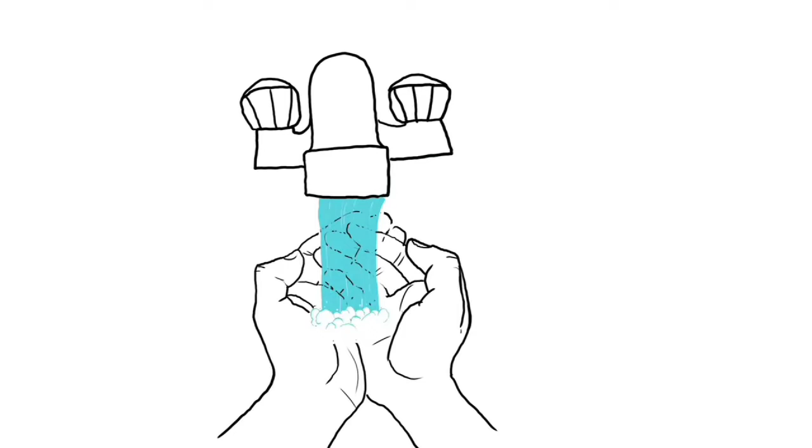You might have heard that we're running out of fresh water. This might sound strange to you because if you live in a place where water flows freely from the tap or shower at any time, it sure doesn't seem like a big deal. It's just there, right? Wrong. The only obvious thing about fresh water is how much we need it. Because it's essential to life, we need to think about it carefully.

Right now, at this very moment, some people, women and girls in particular, walk hours and miles per day to get fresh water. And even then, it may not be clean. Every 15 seconds, a child dies due to waterborne diseases. This is tragic. The most compelling reasons to think about fresh water therefore have to do with the global common good. This means recognizing how much fresh water matters for the flourishing of human and non-human life on Earth, now and in the future.

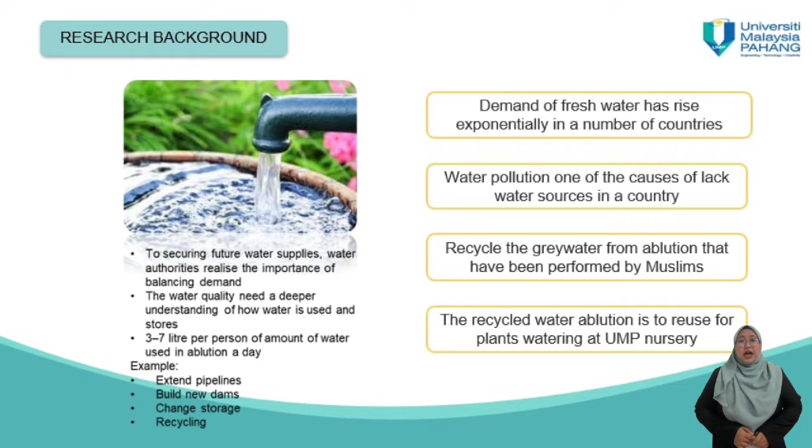Globally, demand of fresh water has risen exponentially in a number of countries. From the research, we know that water pollution is one of the causes of lack of water sources in a country. So another recycling method we can do is recycle the grey water from ablution performed by Muslims. After that, the recycled ablution water can be reused for watering plants at UMP nursery.

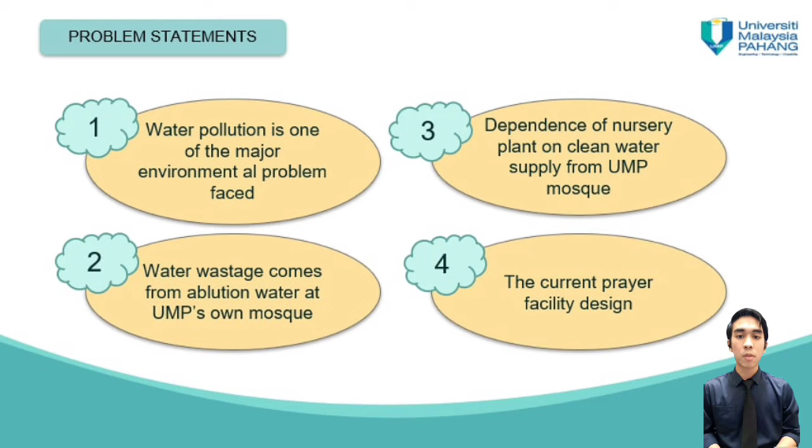For the research background, we have come out with a few problem statements that focus on our research study. First, we found that water pollution is one of the major environmental problems faced. Second, we found that water wastage comes from the ablution water at UMP mosque, and the nursery plants depend on the clean water supply from UMP. Then, the other problem is the current prayer facility design, where the pipeline from the ablution area was directly discharged to the drain without any treatment.

Therefore, based on the problems we found, we aim to study the characteristics of water in UMP Gambang Mosque. After studying the water characteristics, we design and fabricate a filtration system and an Eco-Wudhu system for irrigating plants. Then we evaluate the performance of the Eco-Wudhu system by determining the water characteristics.

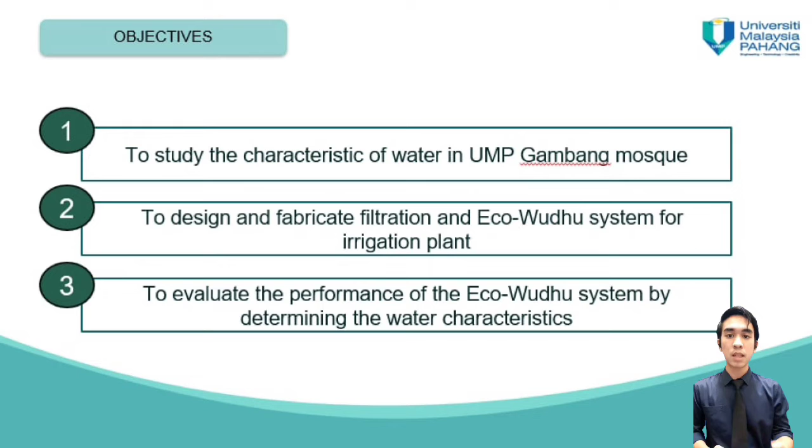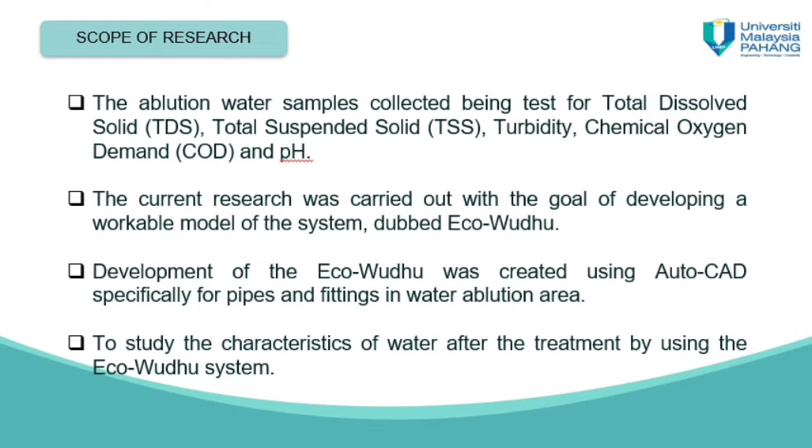Next, the scope of research for this project: the ablution water samples collected are treated and tested for total dissolved solids (TDS), total suspended solids (TSS), turbidity, chemical oxygen demand (COD), and pH. The current research was carried out with the goal of developing a workable model of the system, which is Eco-Wudhu. The development of Eco-Wudhu was created using AutoCAD, specifically for the pipes and fittings in the ablution area. In this study, we also examine the water characteristics after treatment using the Eco-Wudhu system.

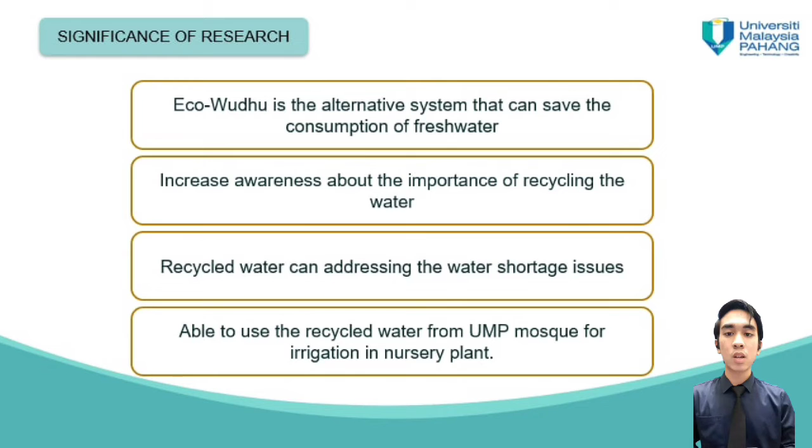The significance of the research is that Eco-Wudhu is an alternative system that can save the consumption of fresh water, and it can also increase awareness about the importance of recycling water. The recycled water can address the water shortage issue. Lastly, we are able to use the recycled water from the UMP mosque for irrigation in the nursery plant.

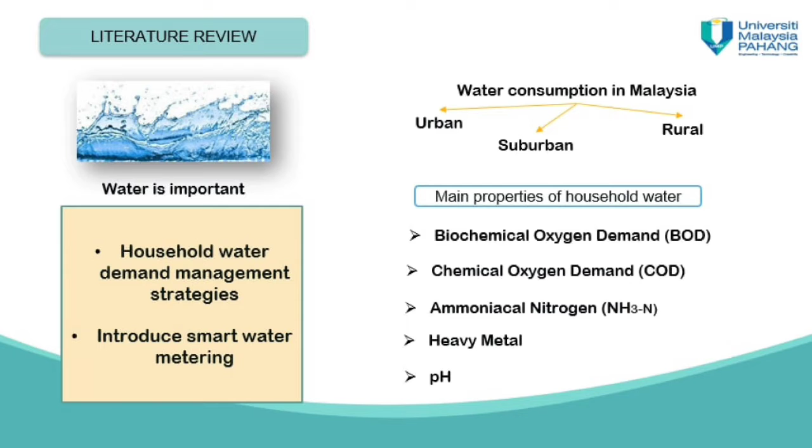Water is important. Therefore, we need management strategies for household water and to introduce smart water metering. Water consumption in Malaysia is needed for urban, suburban and rural areas. The main properties of household water include biochemical oxygen demand (BOD), chemical oxygen demand (COD), ammoniacal nitrogen (NH3-N), heavy metals, and pH.

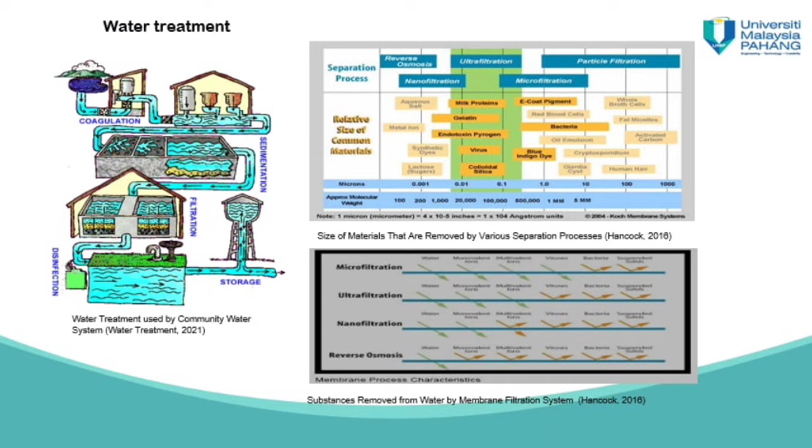Usually, for the current water treatment used by community water systems as per the picture, the system starts from coagulation, sedimentation, filtration, disinfection, and the last one is storage. This is the water conservation strategy. Rainwater harvesting is one of the strategies researched, which can help prevent wastage of water and also reduce irrigation losses. From this water reuse strategy, the water can be used for irrigation, residential uses, urban and recreational uses, and also for aquaculture.

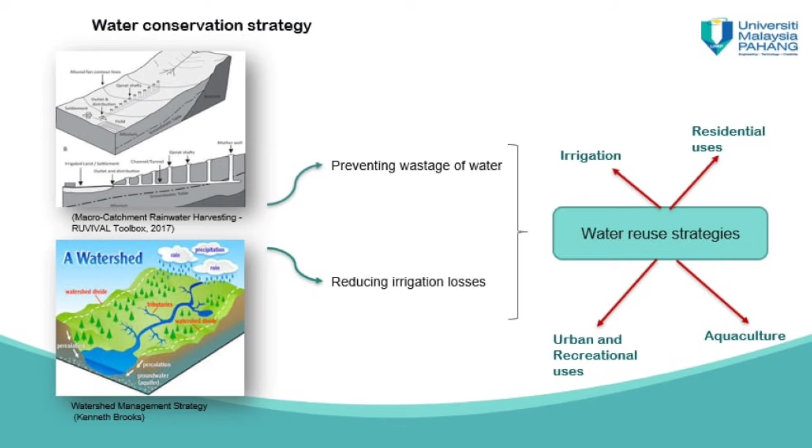Next is the research methodology. Firstly, I would like to explain the flowchart of this project, starting with carrying out the study at the location, which is at UMP Gambang Mosque, from inside view and outside view. Then, we study the sampling location where the greywater discharge outlet of the mosque is. After that, we analyze the characteristics of the greywater discharge in 5 parameters such as total dissolved solids, turbidity, total suspended solids, chemical oxygen demand, and pH.

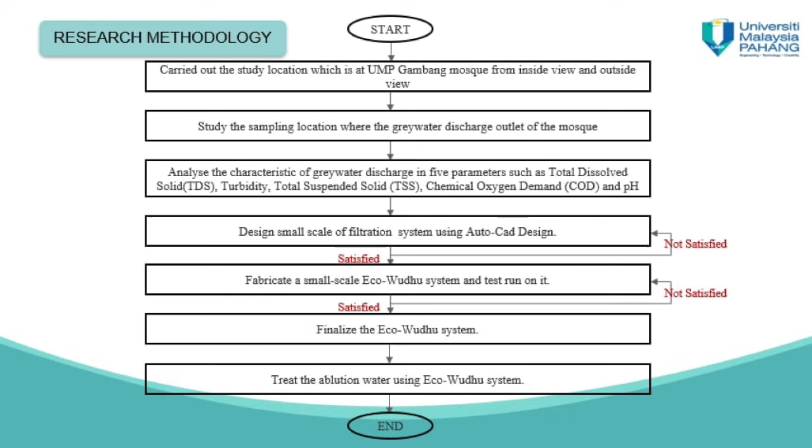We also design a small-scale filtration system using AutoCAD design, and then fabricate a small-scale Eco-Wudhu system and test run on it. After that, we finalize the Eco-Wudhu system and then treat the ablution water using the Eco-Wudhu system.

For the sampling location, the study was located in UMP Gambang Mosque. In this study, we took 3 locations for water sampling. Location A is at the back of the UMP mosque, location B is in front of the UMP mosque, and location C is near the ablution area drainage. The reason we took 3 locations is to make sure that all the ablution water is fully tested and fully treated.

In this project, we carried out a characteristic study of total dissolved solid, turbidity, total suspended solid, chemical oxygen demand, and pH. Then, to ensure good quality of recycled water, the used ablution water should be treated through a sand filter with sand media having an effective size ranging between 0.3 to 1.0 mm, and the uniformity coefficient should range between 1.3 and 1.7 mm.

Then, the sand was sieved to determine the effective size and the uniformity coefficient. For this clean river sand, we determined that the effective size was 0.45 mm and the uniformity coefficient was 1.51 mm.

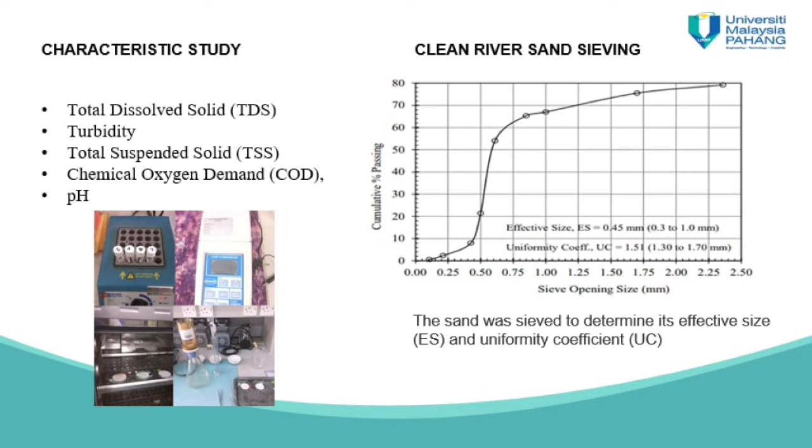For the sand filter, we used a 2 cm thick gravel layer 1, size 0.4 to 0.6, then 12 cm of clean river sand that had been sieved before, 4 cm thick gravel layer 2, size 0.1 to 0.3 cm, and a 4 cm thick stone layer, size 0.5 to 0.1 cm, at the bottom.

Size of the sand filter was determined based on the allowable overflow rate, which is 39.1 meter cube per day. This value falls within the range of slow sand filter, which is 2.9 to 7.6 meter cube per day, and rapid sand filter, which is 120 to 235 meter cube per day.

However, it was realized that the sand filter to clean the used ablution water with a target to use for landscaping can be operated as a slow sand filter to minimize its maintenance frequency.

For this sand filter, its filtration rate was 52.21 meter cube per meter square per hour. It was concluded that it is a low rate and has very good filtration, but requires a very large surface area.

Slow sand filtration systems are characterized by high reliability and rather low life cycle cost. Moreover, neither construction nor operation and maintenance require more than basic skills. Hence, slow sand filtration is a promising filtration method for small to medium-sized rural communities with a fairly good quality initial surface water source.

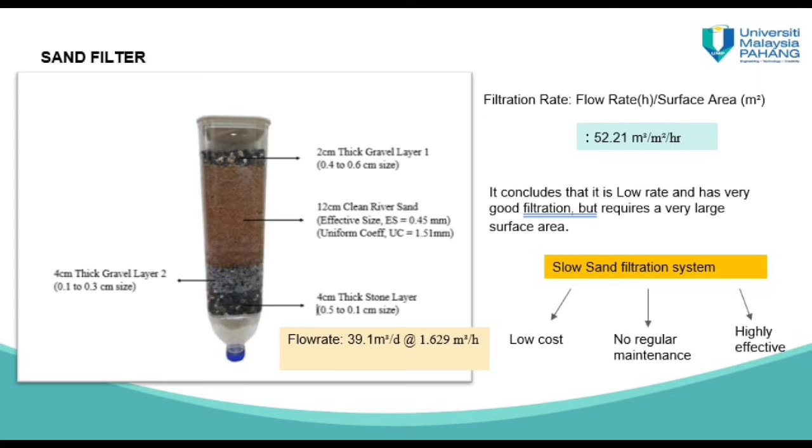This model uses a closed-loop system that has the advantage of minimizing water wastage via greywater discharge and preventing contamination from external sources. It starts with the water being collected in the collection tank, then the water flows into the sand filter for removing fine particles before channeling it into the retention tank.

The use of the retention tank is to give support to the water supply if the water at the distribution tank drops. In this part, we also use an Arduino-controlled water pump to make sure that the water at the distribution tank is always enough to supply clean water.

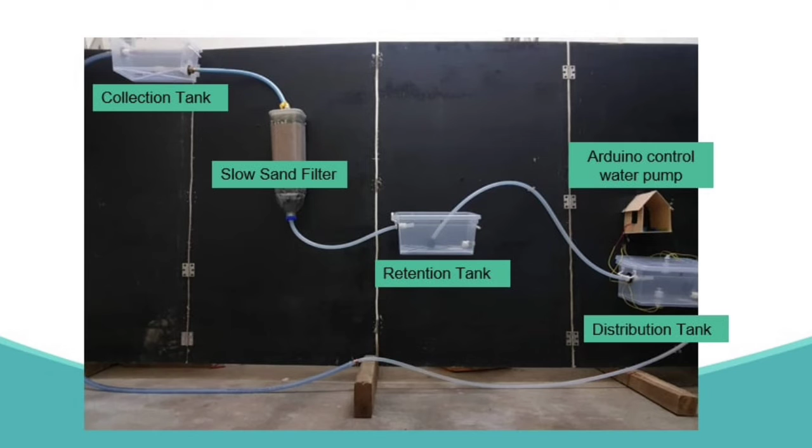No technical abnormalities were found during the test run of the small-scale model, apart from minor hose leakage. This issue was quickly resolved using stronger silicone glue.

Now we see how it works.

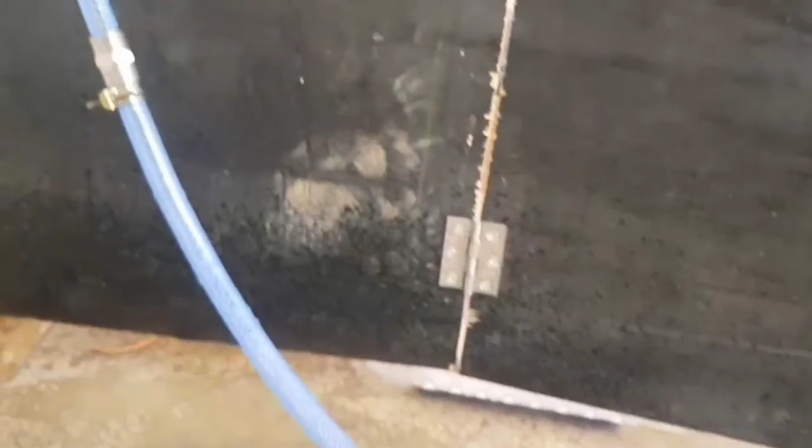It is proof that the sand filter was able to filter the ablution water samples. It was also observed that the mean values of the parameters were lower than the Ministry of Health MOH standard for drinking water quality in Malaysia.

However, it does not necessarily indicate that the treated ablution water is suitable for potable usage, because the chemical oxygen demand (COD) is not available in the standard. In this research, it is more focused on irrigation and other purposes.

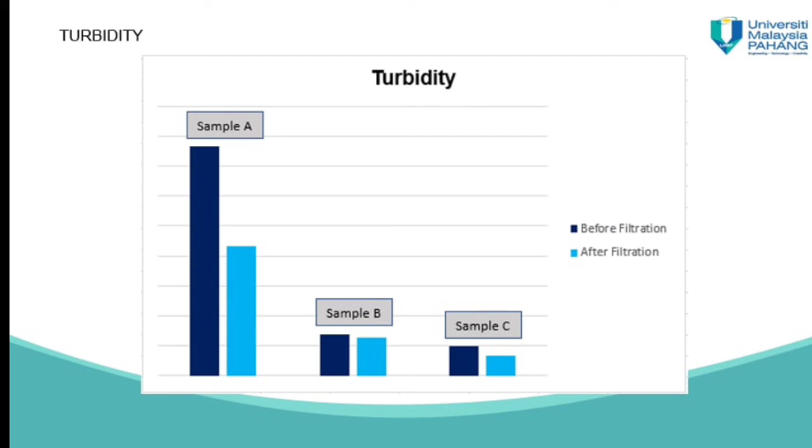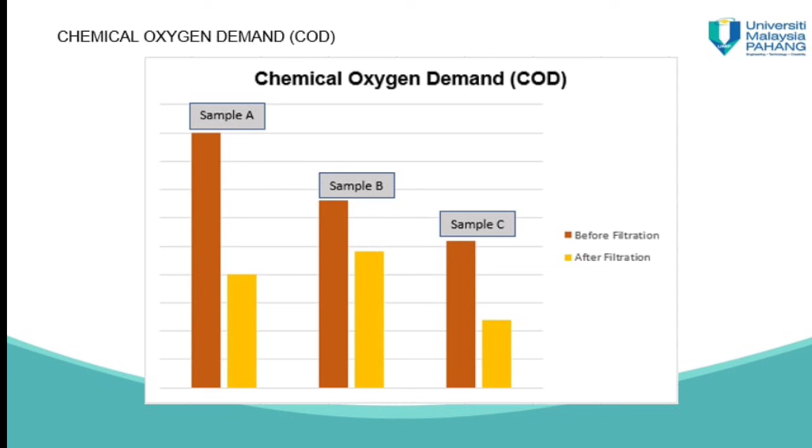For the graph, you can see here, this is the graph for turbidity. It shows the decreasing pattern from before filtration to after filtration for 3 different samples collected, as well as the chemical oxygen demand graph, TSS graph, TDS graph, and the graph for pH.

For the conclusion, the characteristics of water for this study using turbidity, COD, TSS, TDS, and pH have a decreasing pattern. We also successfully designed and fabricated the small-scale eco-wuduk system. From the test, the results of the 5 parameters tested are fulfilling the Ministry of Health standard.

For future recommendation, we can do the upscaling of the eco-wuduk system so it can be installed and used at the UMP Gambang Mosque. Then, the greywater can also be collected from rain harvesting as a source for the eco-wuduk system, for non-potable application. I think that's all from us.